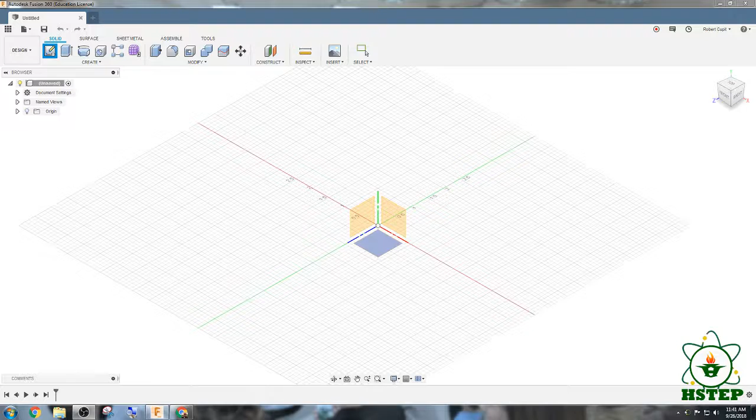So let's see here, first we're going to show you how to create a new sketch. This is a Fusion kind of crash course for those of you who have used Inventor before. You've got new sketch, still new sketch, but now it's up here.

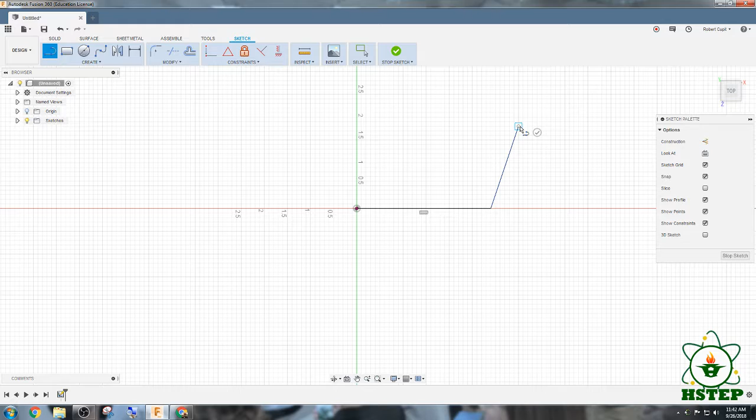Basically, you create a new sketch, select a plane that you want to start drawing on. You're left with this toolbar up here, which is the same, just a little simplified. You're going to select a line command, or just by punching in L, you can draw whatever you want to make it look close to your wing, as long as it locks in and closes, snaps in.

It creates a new color once your plane or your profile is basically closed in. Right click, press OK, stop sketch. Now, as you can see, you're no longer in the sketch mode. You're back into what's called the extrusion mode, the solid mode here.

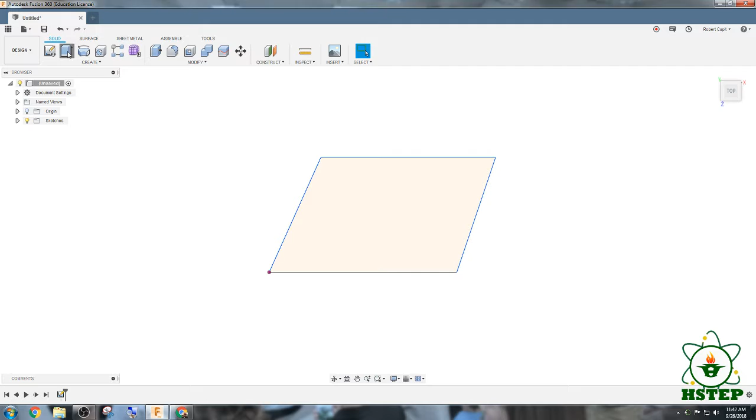You can also then go into extrude, select the plane that you want, and I'm going to rotate it just so that you can see. You can either then pull these devices to extrude your object, and then your distance is right here. Let's say 0.5, press enter.

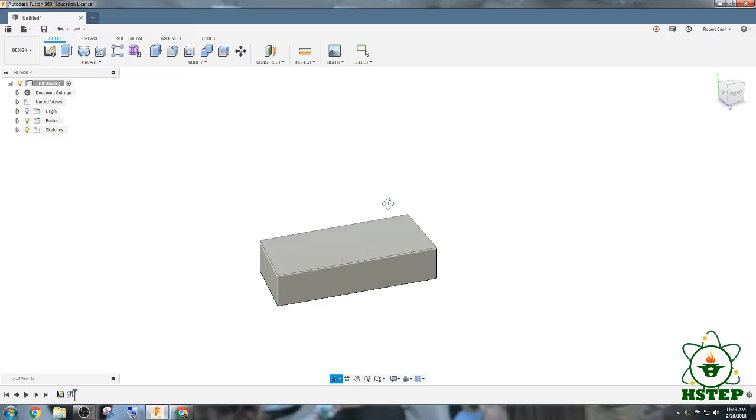You're left with your object. Same rules as far as rotating. If you hold the shift button and then hold in the scroll wheel, you can still rotate around. A home button will bring you back to your isometric, top, right, front cube and all that jazz.

Pretty straightforward there. As far as putting in dimensions, you can either do that while you're in the sketch, or I will go back to that sketch. All your sketches are now over here in the browser instead of you building them at first. If you wanted to go through these sketches, you can.

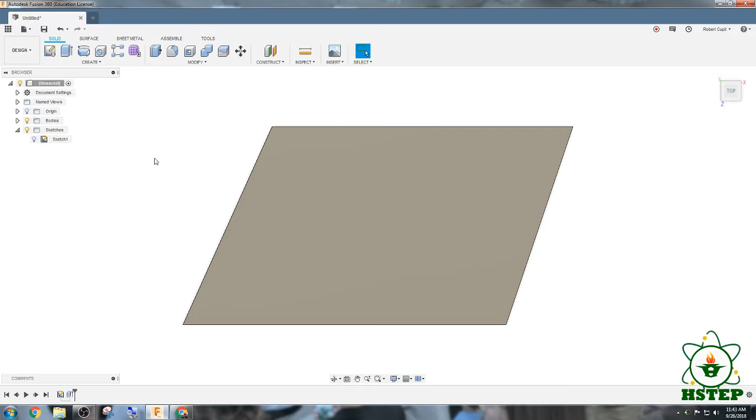Hotkeys and that kind of stuff. If you press the letter S, it'll bring open this prompt while you're in sketch mode. You've got to make sure that you're in sketch mode, so I'll go out of sketch mode. If you press S, then it'll go into shortcuts, a little something different. But if you go back into that sketch, you will then see, if you press S, you can type in pretty much anything you want that you're familiar with.

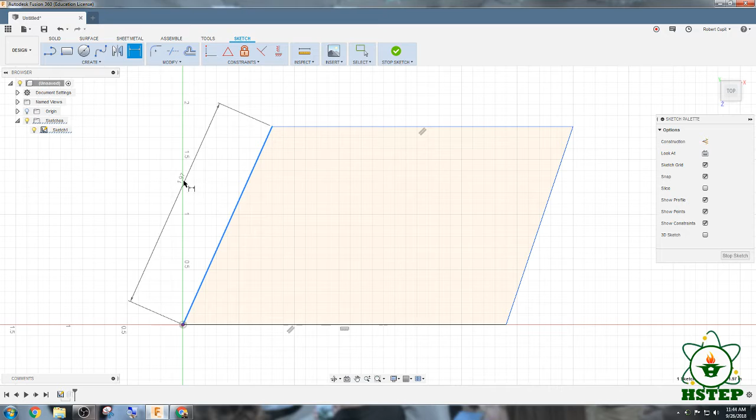Like, for example, sketch dimension. If I started typing in dimension, click dimension, I can then click each one of these, and usually it'll come up, like here, horizontal or vertical. Sometimes it automatically reads it as aligned. If it doesn't, you can right click and then press aligned. It'll automatically lock into that.

Then you can type in pretty much any dimension you want, and again you can continue this until you have everything that you need. Just typing in some random sketches here. Oop, that one was on the angle. So if you mess up while you're in that, you can just go ahead and press the delete button after you select it. It's also right up here.

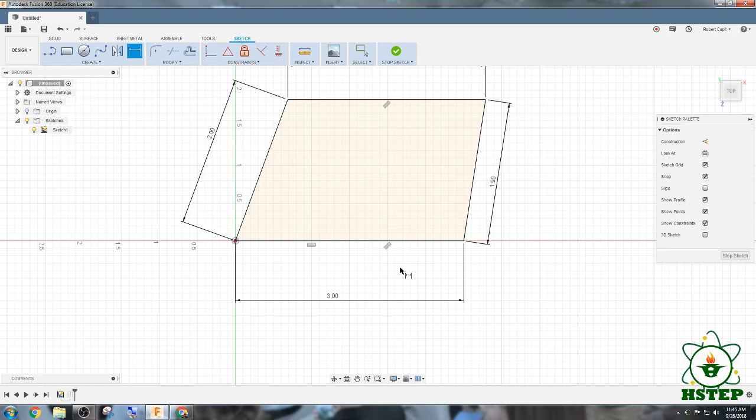Click, goes aligned, I'll say 1.9 just for the sake of time. And then again, it adjusts it accordingly after you have extruded it. So I'll go 3 to show you, makes it look a lot different. You stop the sketch, and the extrusion adjusted to whatever modifications you made to that.

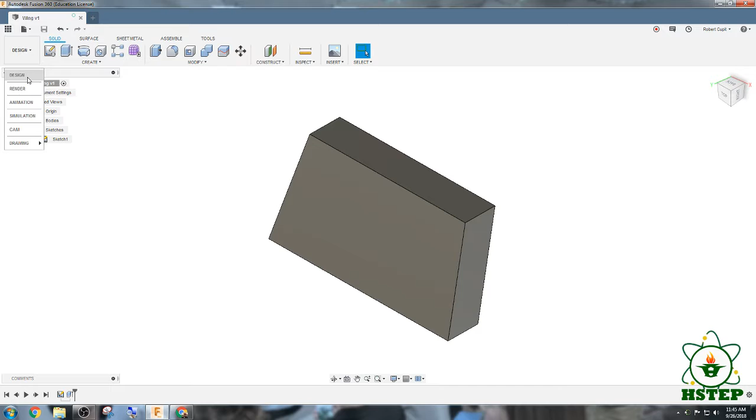After you've saved this, let's say you wanted to get it ready for laser engraving. You go into Design, drop down Design, and you'll see Drawing, Drawing from Design. It'll bring open a prompt, and that prompt will be pretty straightforward from the sketch.

ISO and ASME are basically the standard dimensioning systems you're going to use. I would use ISO, inches or centimeters or millimeters, whatever you want. Create new stays the same. A3 is just the sheet size, and you can automatically adjust that later.

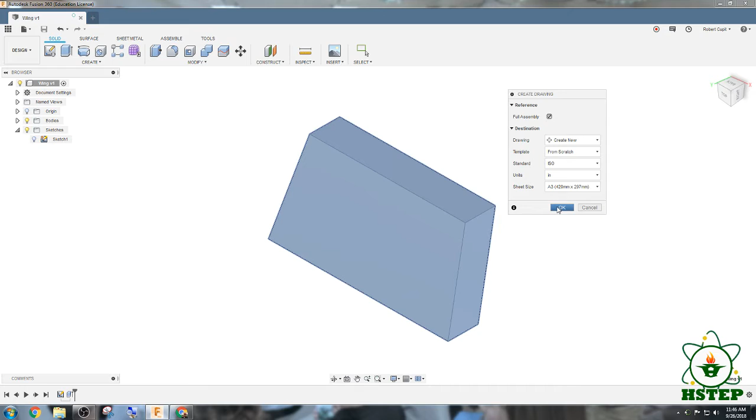So we're just going to press OK. It takes about 10-15 seconds, so give it a chance. But it automatically generates a drawing file, and then you can choose what view you would like to use according to your specifications and how you want it to laser cut.

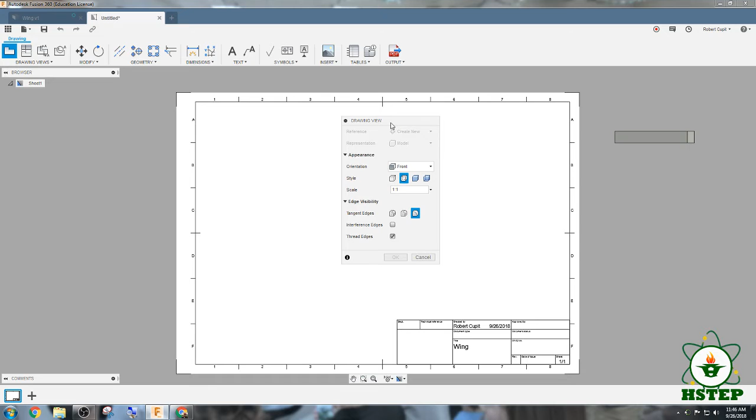After it's done loading, you'll see it pops open everything from your front view orientation. You can then come over here and drop down whatever side you want, top, right. I'll do top just as the example so you can see what you would use for laser engraving.

Scaling, I would leave that 1:1, and I would change the sheet size rather than the scale, just because when you print this and laser engrave it, it might change the actual size of what you made. So I would click just once, and you'll see the OK now comes into dark gray.

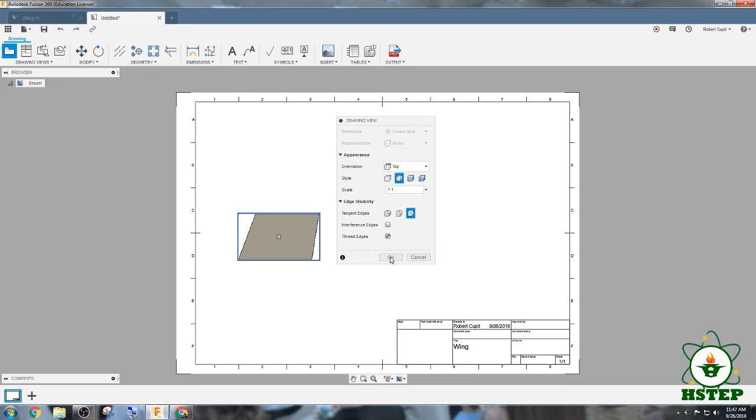And press OK. You can then move it after you right click and hit move. You can move it to wherever you need it to go. You don't have to really click a base point. Then basically click again, press OK, and that deletes all that.

Over here you'll see sheet. You'll see all of it if you double click on your bodies, or if you click on this system here, you'll see all of your stuff. So it's a lot easier than what you would normally do - it's kind of user friendly.

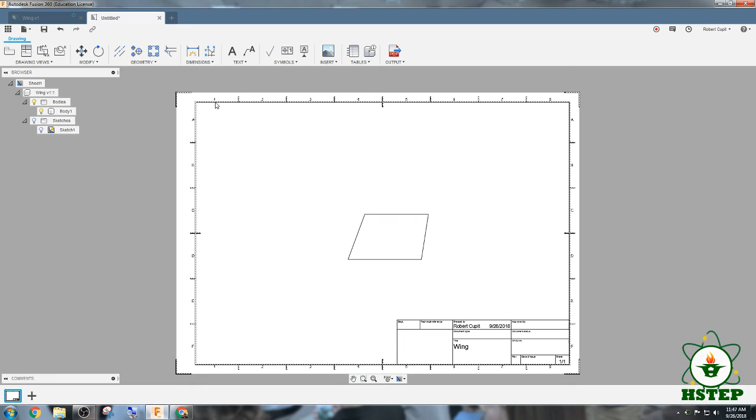If you don't want this, which we don't want for laser engraving, you literally just click and press delete. If you wanted to edit this, you could just double click it, and each one of these you can edit anytime you need to. But for our sake, we want to delete that altogether too. So you click that, press delete, and now you're left with just your object.

Then make sure you file and save that as a drawing file, so that'll be wing drawing. It'll automatically save it as that type, which is what we want. You press save just so that you have it for your own references.

Then you're going to come up here, and we want it to save as a PDF as well. So you drop down output as PDF, all sheets, and then you can open the PDF if you want, but I don't do that. You can save it wherever you need to, on the desktop, in a drive, wherever you want it to save.

Once you press save, it'll come up and you'll be able to open that document as a PDF version, wherever you need it to, basically. That's it - easy peasy.